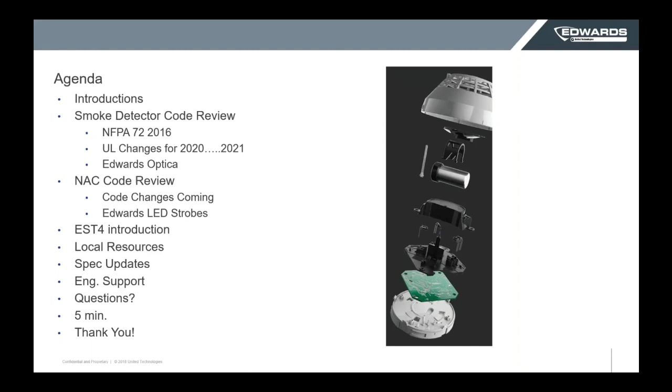So just a quick little bit about me. I've been with Edwards now for 4 years. Prior to that, I sold Hyperspike speakers for 7 years, designing indoor and outdoor mass notification systems. So if you have any questions with giant voice or anything else like that, I've been in there. Also, I have a GROL license for the bidirectional amplifiers for the firefighter radio systems.

I live in Southwest Michigan. You can trust me because I do proclaim that I'm actually a Detroit Lions fan, and no one would publicly admit that.

For local resources, Edwards actually goes through local distributors around the country. We have 350 Edwards distributors throughout the U.S. Local distributors for the state of Indiana are New Era, ATN, and CSC. They are truly local resources where you can lean on them and ask them for local code questions, or if there's a special question I usually bring them in.

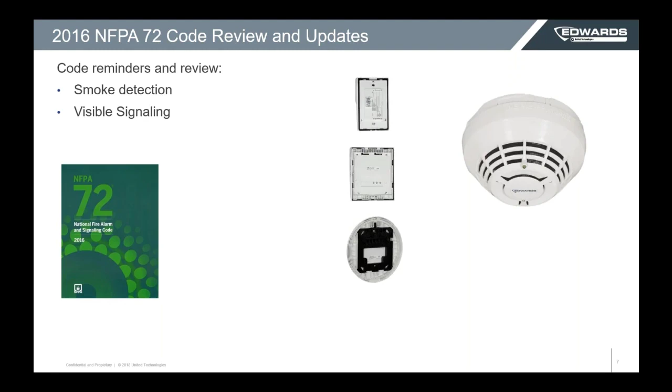So jumping into the NFPA 72-2016 for smoke detection and visible signaling. Yes, I know Indiana's based on 2010 code, but in the future, when they actually do adopt some codes, you'll be prepared. And there's really not too many changes out there. Usually code just adds more sections, gives more clarification language. They typically never really delete anything away from the code.

So kind of question time here, and you can kind of write your answers down, but I always like to start at the basics. I've been working with a lot of younger engineers. The NFPA 72 code establishes the blank required levels of performance, extent, redundancy, and quality of installation. Your options are maximum, minimum, necessary, or crucial. And what I like to say is that code is the minimum. So remember, when you're reading NFPA 72, that is the minimum code that you have to do for a facility.

Also, two key important words that you have to see when you are reading the code. Shall indicates a blank requirement, and your options are mandatory or recommended. And the answer is mandatory. Should indicates a recommendation, but is not required. So when you're reading through the code book, you see shall, you see should. Those are very, very important words to read, and you'll actually see this throughout the presentation. So when I say the word shall, I hope your ears are perking up.

So jumping into some detection and design notes. There are places where smoke detectors can and cannot go. So detectors cannot go in temperatures below 32 degrees Fahrenheit or above 100 degrees Fahrenheit. We live in the Midwest. I think we can see that all within 1 week. We also have to worry about relative humidity and air velocity greater than 300 feet per minute. That's usually if you're in a data center or a hospital where they want a lot of air exchanges to clean the air to make sure it's healthy.

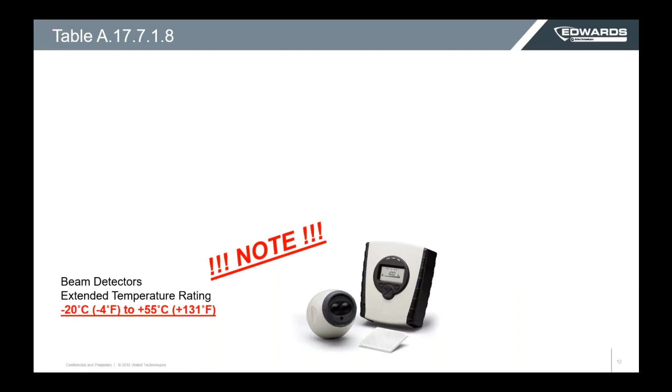Also, beam detectors, if we had those wide open areas, give us a little bit better temperature rating. So if you do have that wide open environment with more fluctuation, beam detectors might be an option. But we also have to look at the color of smoke. What is actually going to produce the smoke in that facility? We know what type of building this is, but what are the potential smokes that could come out of that building? Are those going to be hazardous or cause issues with their fire alarm system?

When we look at the color of smoke, code says the location of smoke detectors shall be based on evaluation of potential ambient sources of smoke, moisture, dust, and fumes. It calls out in the design notes a little bit more back in the annex of NFPA 72. Even engine exhaust, diesel trucks, locomotives, engines, those can produce a lot of nuisance alarms.

A great case in point: I was working with the Indianapolis International Airport. They were building a new building to warehouse all their snowplow trucks, and they wanted that building to be protected by the fire alarm. But we had really big doors opening and closing, so we were going to be outside of our temperature range. And we had diesel trucks that were going to idle in there and warm up. They weren't sure how the exhaust system was going to be.

So we talked with the engineer, talked with the local AHJ, worked with our dealer on a path forward, and we realized we're going to use weatherproof rated heat detectors. That way they could survive the environmental conditions, we weren't going to get nuisance alarms, and they were going to be protected. What I always say is a 2-minute phone call can save you 2 hours worth of work.

When we look at placement, spot type smoke detectors can be located on the ceiling, or on the sidewall between the ceiling and 12 inches down from the ceiling to the top of the detector. So our detector can go all the way up in the corner and all the way down within 12 inches from the top of the detector.

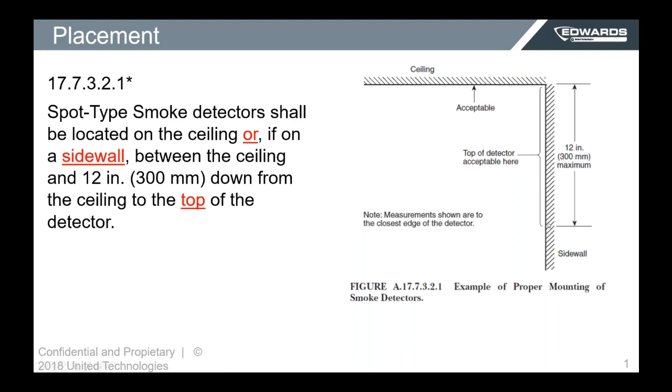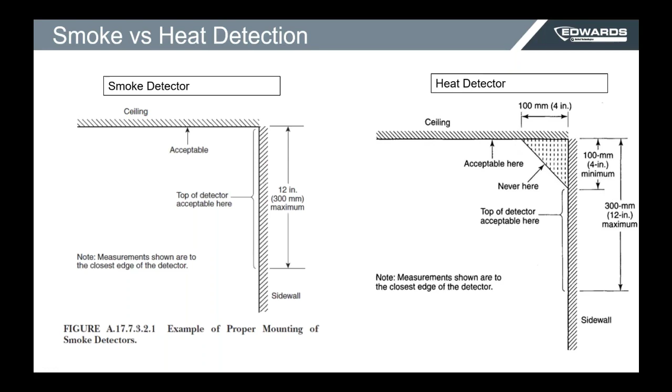The reason I point this out is because smoke detectors and heat detectors have to be treated separately. A smoke detector can go in the corner. A heat detector cannot come into the top 4 inches within that corner of the wall. So be wary of that. Heat detectors and smoke detectors look the same, sound the same, feel the same, but they have to be treated differently based on the criteria.

So we look at smoke detection spacing. On smooth ceilings, spacing for spot type smoke detectors shall be in accordance with these parameters below. This is a very dense amount of information, but don't worry, I have some examples I'll show in a second. The distance between smoke detectors shall not exceed a nominal spacing of 30 feet. No ifs, ands, or buts. From detector to detector, you're not going past 30 feet. There is an exception; we will talk about that.

And there shall be detectors within a distance of 1/2 the nominal spacing measured at right angles from the wall partitions. So our first detector, from the top of the wall and from the left of the wall, has to be 15 feet off. That's where our 30-foot spacing comes from.

So we're going to go 15 feet out in one direction, 15 feet out in the other direction. So if I have 2 detectors, 15 plus 15 is going to be 30. We also have to worry about how high our walls are going to come up. If it's going to come into that top 15% of that pocket, we have an issue.

Also, we're never going to have a perfect square for a building, so that's why they have what they call the 0.7 rule. All points of the ceiling shall have a detector within a distance equal to or less than 0.7 times the 30-foot spacing. So let's jump into some examples of that.

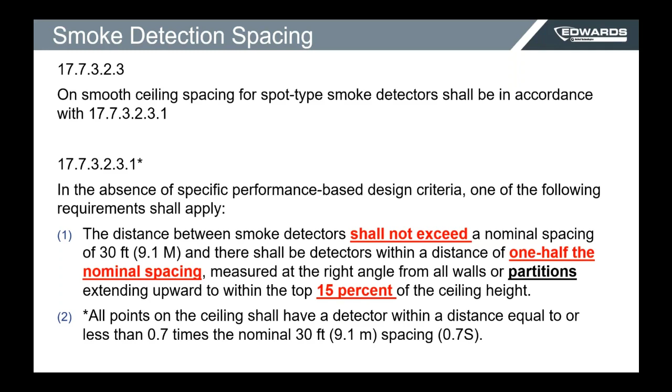So we first said, well, hey, I need to have a detector 15 feet away from the wall and 15 feet away from the wall. Well, we're smart engineers. A squared plus B squared equals C squared. Well, that would give us 21 feet. So based on our 0.7 rule, 30 times 0.7, that's 21 feet. That's where that 0.7 rule comes from.

We also said that detectors can't go past 30 feet from detector to detector. Well, we've all been in a hotel and they have really, really narrow corridors. Code actually calls that out. So if we had 10-foot wide corridors, I can actually extend that spacing up to 41 feet.

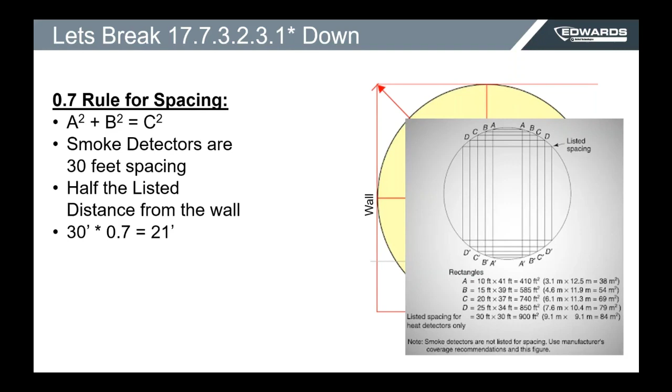11 feet doesn't seem like a lot, but if we were looking at a high-rise application or a really big apartment style complex with corridor smokes, remember the end user is paying for test and inspect and service on their system. So if we can eliminate 15, 16, 17, 30 devices, that's going to be more cost effective for our customer, and their ongoing test and inspect is going to be a lot lower. So just keep that in mind.

So when we look at smoke detectors, this is a quick little quiz. How do we actually know how many we need for a room? What's the math behind it? You'll be surprised. It's a little bit trickier than you think. So a detector is 30 by 30 coverage. That's 900 square feet. But how many detectors do I need for a 40 by 40 room? I'm going to pause here for a second, take a sip of water, let you think about it.

A lot of people will answer 2. That's not the right answer. So if you did guess 2, then you were wrong. If we did 1, we're going to be 10 feet short to this side of the wall, and we're going to be 29 feet. We went past that 21-foot rule. If we did 2, we're 10 feet short. The answer is 4. A lot of people think, well, hey, 30 times 30, 900 square feet, 40 by 40, 1,600 square feet, divide, about 1.7, that should be 2. That's not the math.

The math is actually a length times width calculation. 40 feet divided by 30 is 1.3. And then the width, 40 divided by 30 is 1.3. We have to round those to 2. 2 times 2 equals 4. This is the real math. Your square footage math will work out sometimes, but this is to ensure that you get the right answer every time.

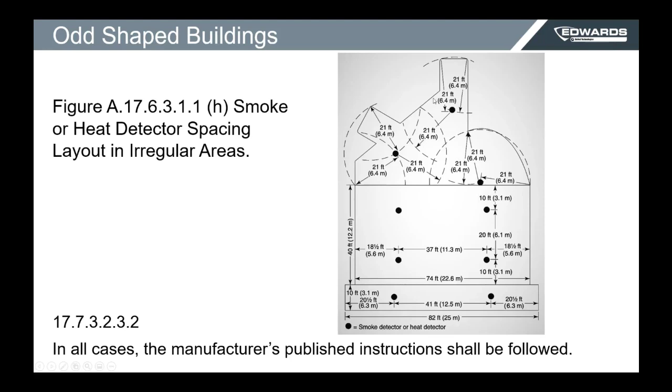So as we talked about earlier, no building is ever going to be a perfect square. We could have a dome, we could have a little jut out from a building, but as long as my smoke detector is within 21 feet of that head, we're good to go.

Next example is we have an office environment, ceiling height of 8 feet, cubicle height of 6 feet. Do I have to treat each cubicle as a separate room? And the answer is no. But if I did have cubicle heights of 7 feet, we would, because we'd be coming into that top 15%. Right now, we're 25% away from the ceiling, not 15% away from the ceiling.

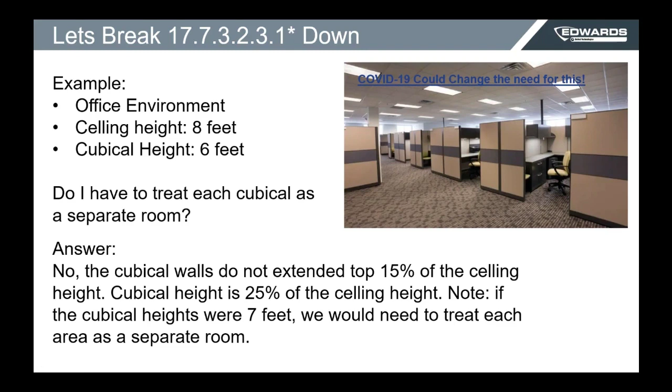The reason why is we have to allow that smoke to come up and travel and hit the detectors, and that's what they're worried about if you have high cubicles or other sites out there with high rack storage or anything like that. So a big growing concern out there is the high rack storage in these distribution centers.

So when we actually look, what are they actually classified as? They're actually classified as a storage group S occupancy, S for storage. So you're like, that's great. I'm going to look up the building code. That's going to tell me what I need for a fire alarm system and how to do it. That's going to save me.

What does it show? Well, when you look at International Building Code or Indiana Building Code, if you look at 907, which is the section for fire alarms, Group S will not show up. Is fire detection desired by the AHJ? That's a question you have to ask. So there's actually a second party out there that has controlling interest. That is the insurance providers.

So the new Walmart distribution center on the east side of Indianapolis, FM Global mandated that they had smoke detection throughout their whole facility. That's where we used the air sampling system. That's another hour-long presentation; if you're interested in that, let me know. That's what we had to put throughout the whole facility because there was an insurance requirement. The insurance provider wanted to make sure that they were covered. So that's another question you should be asking your clients: are there any parameters your insurance provider might put on this project?

So another question, I like asking questions through my presentation to make sure that you're paying attention. Does the date May 2020 mean anything to anyone? And yes, I know this date's in the past. My wedding anniversary is that month. I should start planning something for my wedding anniversary. We all can agree that's usually when the snow will stop in the Midwest. Or that's when the UL 268 7th edition for smoke detectors should have taken effect. So I really hope you got this right. The correct answer is D.

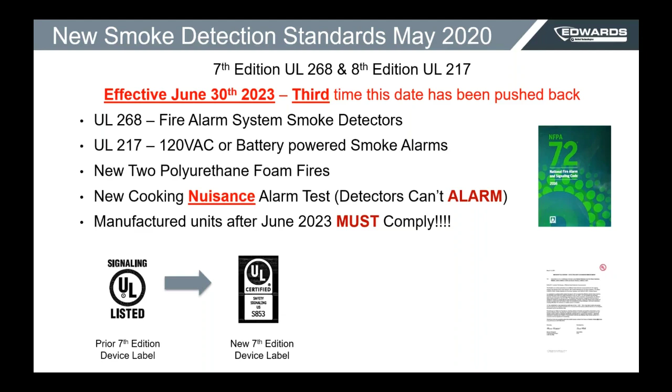So there are a lot of client concerns: do existing platforms support the new UL change? If you're doing specifications or working with people, are they going to have a big upgrade to their system? There are manufacturers out there that have to add in a whole new data loop. Are they getting the latest and greatest technology? And is it a complex or simple migration path? If you're working with a customer or a vendor, you might want to have this discussion to make sure it's going to be a simple migration path.

So the new thing is listed for multi-criteria. It's cooking, steam, and aerosol resistant. Steam is great. I actually have a video here I could show later if needed, but it is steam resistant, because that'll help for places like hotels.

Like I once hurt my back, took a really hot shower, opened up the shower door, boom, tripped my sounder base. I was running out of my room with the towel on. It was just my room because I had a false alarm. And we do have a smoke only. That is key because a lot of people are having to add in a secondary sensor to their devices in order to meet that standard.

So if I had to have a smoke and CO combo in order to do the analytics to meet that, well, CO detectors have to be replaced every 10 years. So you just gave that customer a big old upgrade. And is everything backwards compatible? That's another question that should be asked. I kind of point this out here.

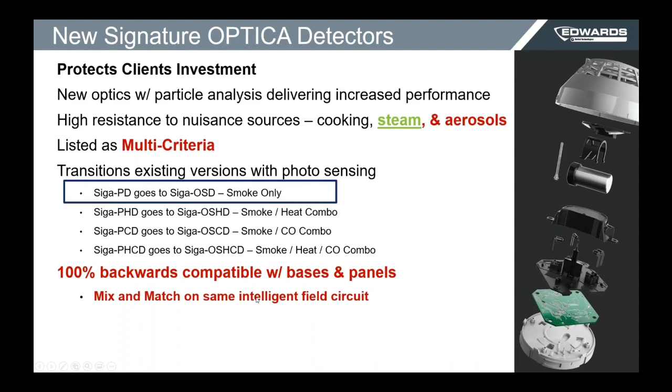So we actually have a case study and white paper on a college campus out on the East Coast where they had the old style detectors and used the new style, and their false alarms went to almost zero. They only had one incident, and that was because the smoke left and went to an area where they hadn't had a chance to upgrade the units.

I have a dealer right now working with a very major Midwest university located in Michigan, maybe on the southeast side, near Detroit, maybe in Ann Arbor. And they have upgraded, I think, about 3,000 to 4,000 detectors out there. So just very helpful in those types of environments.

So people always ask, well, how's it doing the analytics and what is it doing? What they did is kind of take a three-dimensional report. Instead of just looking at obscuration, they added in extra LEDs to look at it multi-wave, multi-length, to measure the particle size better to determine, is this an actual burning substance or burning food?

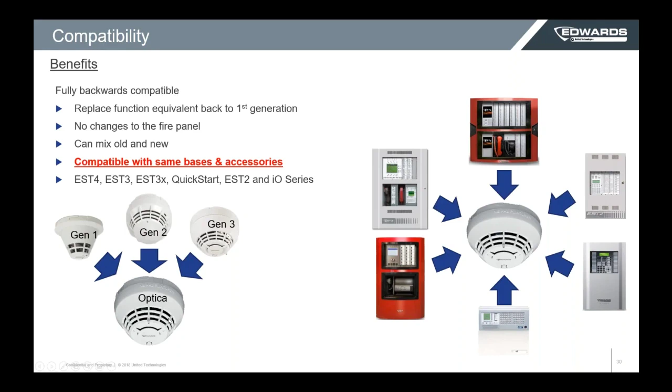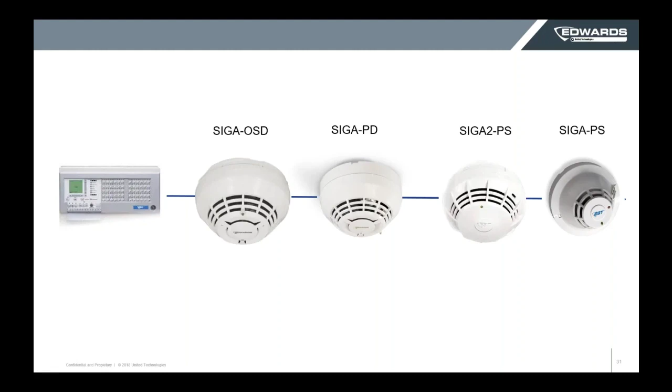So one thing I like to note on the Edwards, we talked about backwards compatibility, is that our detectors are compatible with our panels that are 25 plus years old. So you can have all the different units out there. With our old panel, Quick Start, which is 25 plus years old, you can have our Gen 1, 2, 3, and 4 all in the same data loop, no problem. And then I can upgrade your panels all the way to our latest and greatest EST4 with no issue.

So watch out for misleading marketing language I've seen out there that doesn't clearly state that it's listed or certified to the new UL 268 7th edition. It has to say listed or certified. Those are the key words. Because data sheets could say designed to meet, designed to comply with, complies with. It has to say certified or listed to that. Those are the key words from UL.

So really great places for installations are higher education and teacher break rooms. They usually have a dishwasher there, and you open up the dishwasher, the steam comes out. Hotels and apartment complexes. So those are really the key locations.

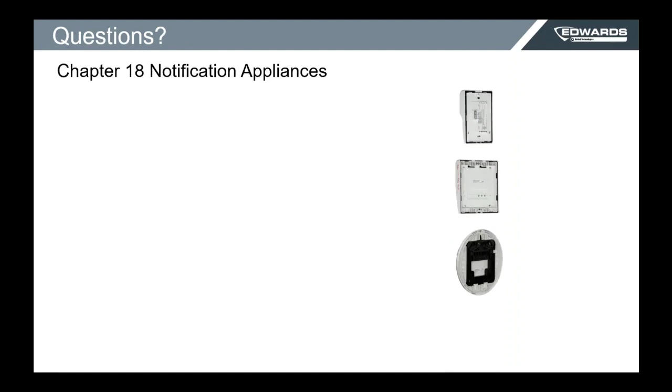And now we're going to move into notification appliances. All right. So jumping in here, notification appliances. When I would design audio systems at my last job, my first question was, is this a public mode application or a private mode application? That's pretty key, because public mode is where it's going to go to a central monitoring station, versus private mode, where you're going to have somebody there at a 24/7 manned station that can then call the fire department.

Public mode has to be 15 dB above ambient, or 5 dB above maximum sound pressure level. Private mode is only 10 dB. Now, if you remember from engineering school, every 3 dB I increase is a 100% increase in power. So it's almost a 200% power increase from private mode to public mode. That's key when designing a system, because that'll drastically change the amount of amplifiers and wiring and everything else you would need.

And another key point that everyone has forgotten: the peak maximum dB level has to be a duration of 60 seconds or longer, whichever is greater. So that's very important, because I get these designs for warehouses like, oh, it's 90 decibels in there. Well, are they wearing hearing protection? Oh, no, it's a warehouse. Well, what happened was the forklift went by, honked its horn, and they thought that had to be considered.

Now, you could have a stamping plant or production plant where they have a constant bang, but there's pauses and it's not a constant 60 seconds. You kind of want to take a common sense approach to that. So when we look at the dB levels and make sure they're accurate measurements, usually in an office environment or school environment, those are pretty copy and paste.

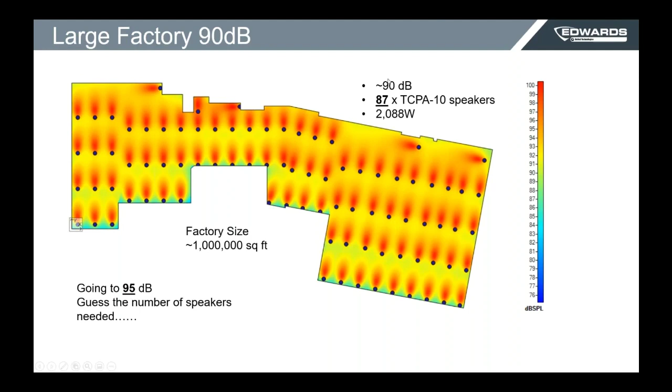So the engineer came to me. They like to be safe. They said, what about going to 95 decibels? Well, let's guess how many speakers. 87 at 90, and then it jumped up to 167 speakers and doubled the power requirements. Huge cost implications. So again, when we're looking at these facilities, it's good to take the extra time to get accurate dB levels.

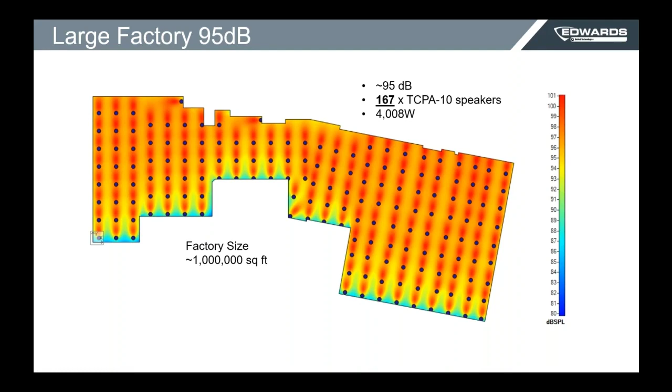Also, some code: if the average ambient sound level is greater than 105 decibels, it shall require the use of visual notification appliances. Well, it makes sense. If it's really, really loud, let's put some blinky things in there to let people know in case they can't hear. Also, it says the total sound pressure level shall not exceed 110 decibels at the minimum hearing height. Typically 5 feet is what they call the minimum hearing height.

I get this asked a lot, because if it's really, really loud and we have to make it really loud in that manufacturing site, how do we get around this code requirement? Well, what do you think everybody is typically wearing in those types of environments? You guessed it, hearing protection. But what does code say about that? Do they actually account for that? The answer is yes. Hearing protection can attenuate both ambient noise levels and audible signals. In spaces where hearing protection is worn due to ambient noise conditions, visible signal appliances should be considered.

Well, it makes sense. If it's really, really loud, OSHA is going to make us wear hearing protection. It says, in addition, where hearing protection is worn due to high ambient noise conditions, the audible signals and ambient noise measurements can be analyzed, and the audible signals can be adjusted to account for attenuation caused by hearing protection. Code allows you to take hearing protection into consideration.

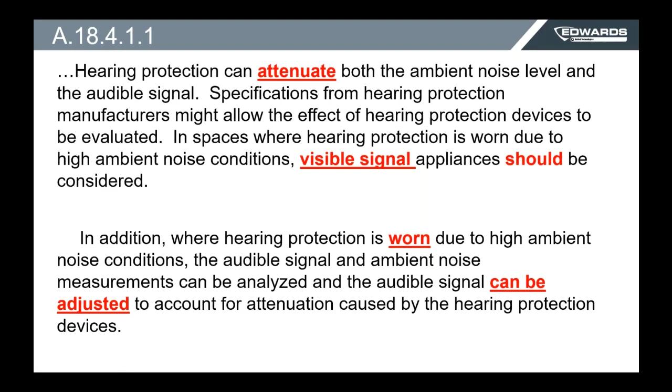Exceptions. In elevator cars or bathrooms, they allow you to go off private mode where you don't need to be 15 dB above ambient, but that requires AHJ approval. Typically an elevator car or a bathroom is small, with hard surfaces everywhere. Those are really easy to hit the needed sound pressure levels in.

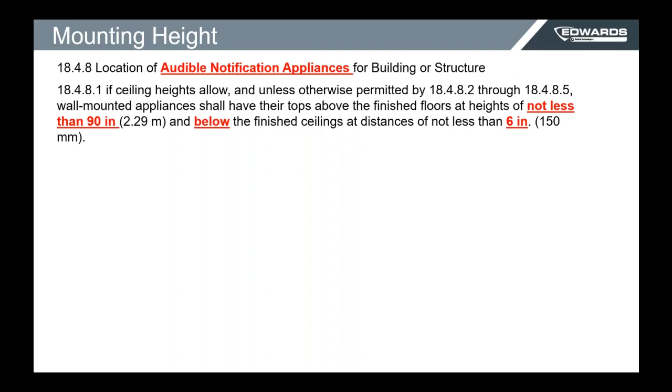Now, when we look at mounting height, we have a visual mounting height, an audio visual mounting height and an audio mounting height. For audio only, notification appliance mounting height is not less than 90 inches. But if I have a combination of audio and visual, you shall go off the visual mounting height. So again, audio only, a horn only, a speaker only can't be less than 90 inches. Audio visual is not less than 80 inches, but not greater than 96 inches, because we have to worry about the candela rating for the strobe part.

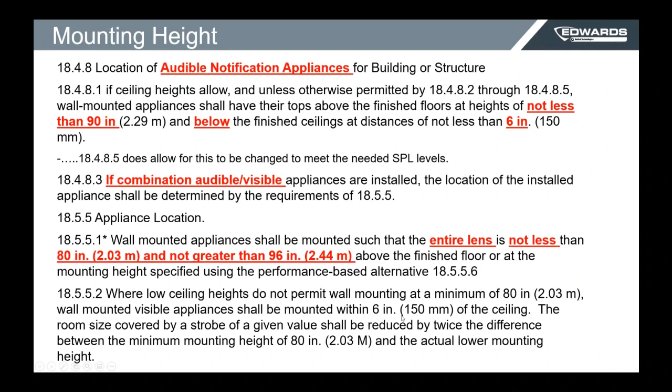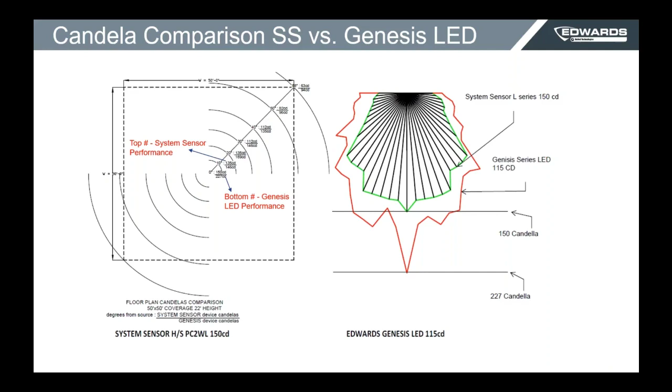So what I like to say is just pick the happy medium, go off 92 inches, and there you go. If you have a mixture, you're fine on that part. It also calls out if you have low ceiling heights, they want you to be 6 inches below that. We have a performance-based design criteria that you can use, because what we found out is our 115 candela strobe can actually produce 227 candela.

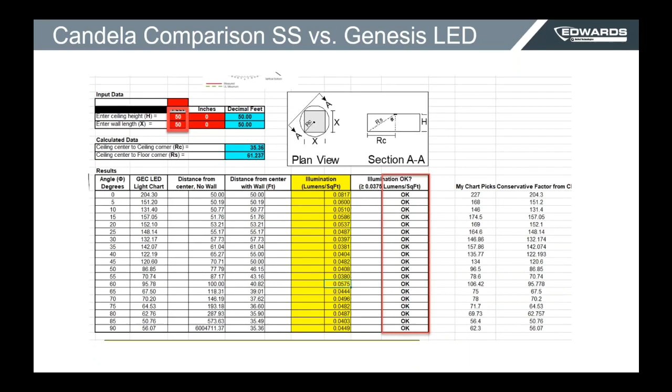So what that allows us to do is actually mount our devices even higher and still meet the minimum lumens per square foot requirement. That's a huge cost savings, because if that installer has to run a man lift, run the conduit, run the junction boxes, that's a lot of money per device for these warehouses.

So there's actually 3 safety factors built in. Based on our calculation, we use the hypotenuse angle versus the right side of the wall, because we know our longest angle on a triangle is the hypotenuse. So there's one safety factor. Also, the calculation that NFPA references, the UL 1971, actually has a built-in safety factor as well.

And our dealers also put in a 10% safety factor. So when they scale the drawings to get those measurements, they come back to make sure they're within or below the 227 candela to ensure that that's there. So you have 3 safety factors built in to give a really cost-effective solution to your customers.

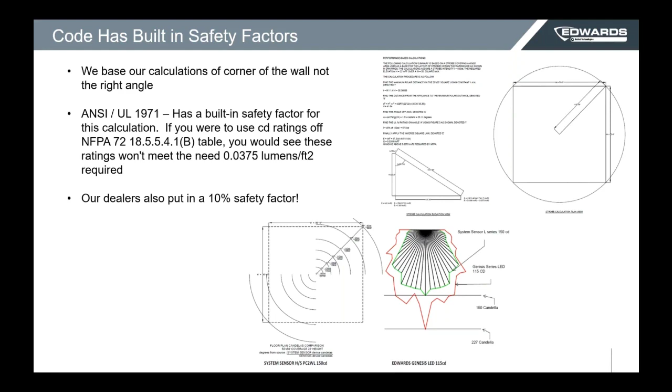So future code changes. We talked about sound over ambient. Code now is looking at light over ambient, believe it or not. So they're actually looking at this. So when we have all these energy efficient buildings for natural light, and when you look at hospitals or schools with a lot of natural light that are bright, they want to make sure that people can actually see the strobes when they go off.

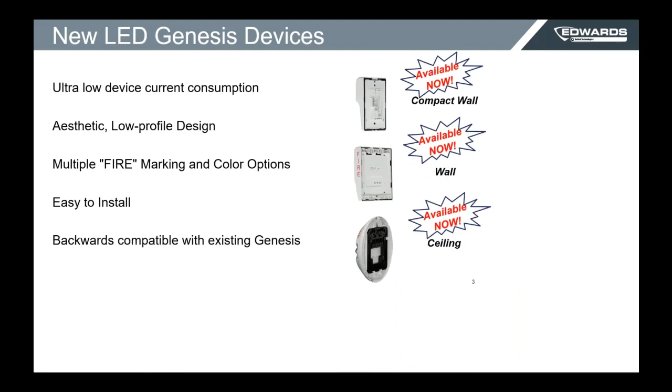So we actually did just come out with our new compact wall LED notification appliances. And the reason why I want to point this out is because we had a really reduced current draw, but we only have one tap setting for all the candela ratings. So what that does is that 15 candela and 110 candela pull the same current draw.

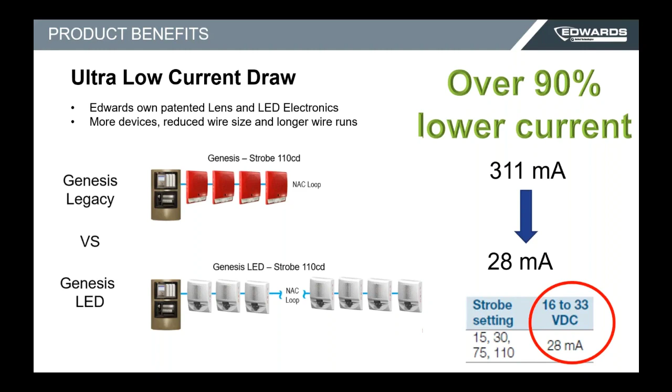So again, backwards compatible with our system, so if these light over ambient conditions take place, we can use everything to help account for that. That way they don't have to spend a lot of money to redo their system, add wiring, add extra booster power supplies. So why is this important? It's going to future-proof your customers, no additional equipment costs, simple retrofit, and simple upgrades.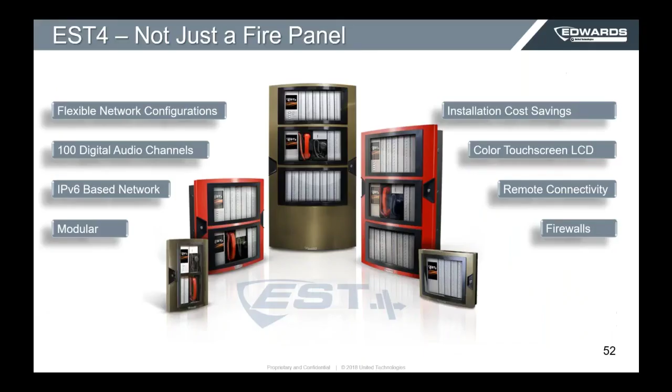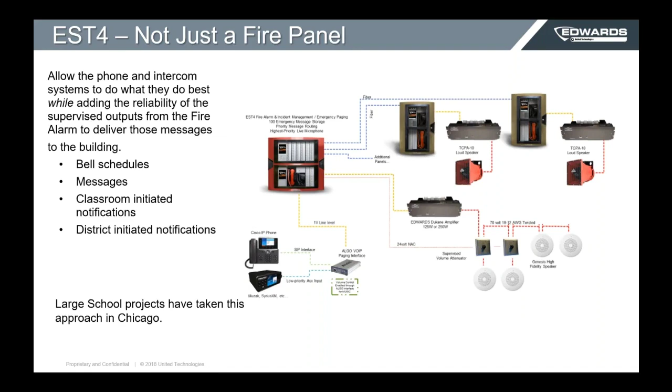So I'd just like to point out that the new panel we have now is the EST4, and this can actually be used as your mass notification system as well. So if you have school projects, there's a lot of ways to interface this with paging solution systems out there. And just note, if you do want to look at using the fire system and the paging solution, we do have a specification we can have you look at.